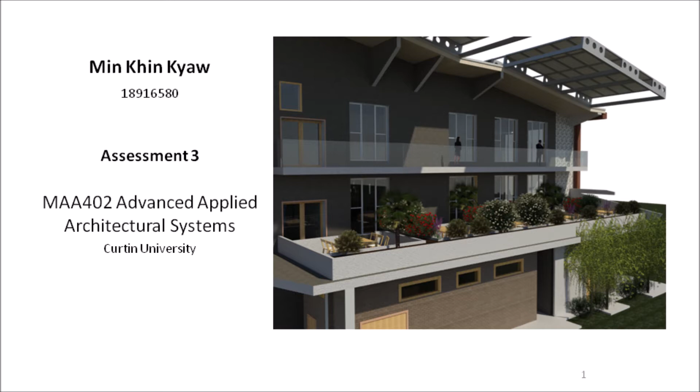My case study is Building 215 of Curtin University. Its location is 12 Ridley Walk, Bentley, WA 6102. My role is to study energy.

The objectives of the study are: first, to identify the environmental and technological systems of the case study building. Second, to develop a new envelope for the case study building. That is, to use an energy analysis tool to test the existing envelope and the new envelope.

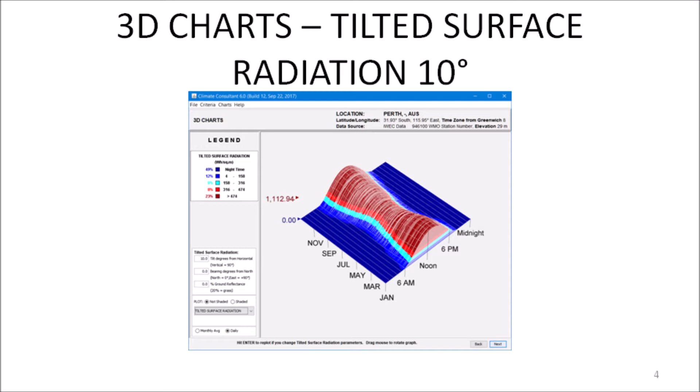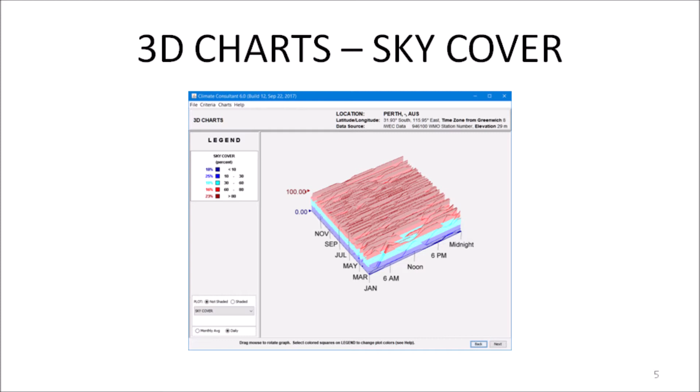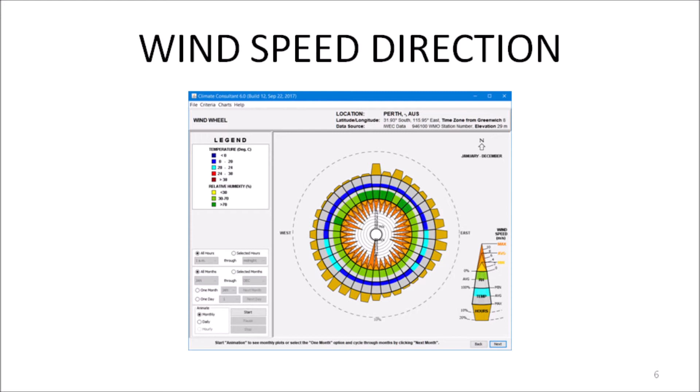Environmental system is the climate and weather. Technological system of a building is everything that makes the building. The building is architectonic components designed and put together by architects and engineers for human occupation. Technological system must be able to withstand undesirable effects and use the desirable effects of the environmental system.

Perth is in climate zone 5, warm temperate. The first stage is to identify the environmental and technological systems of the case study building.

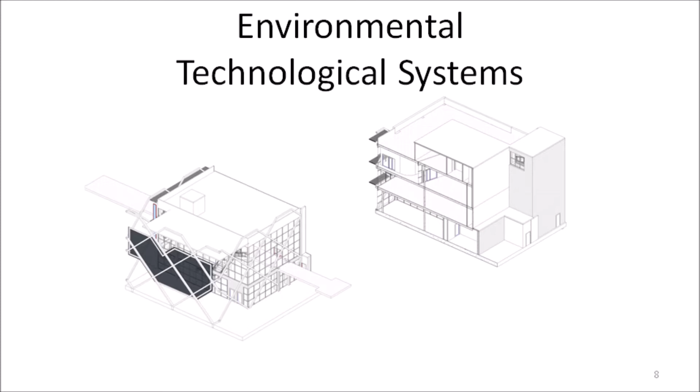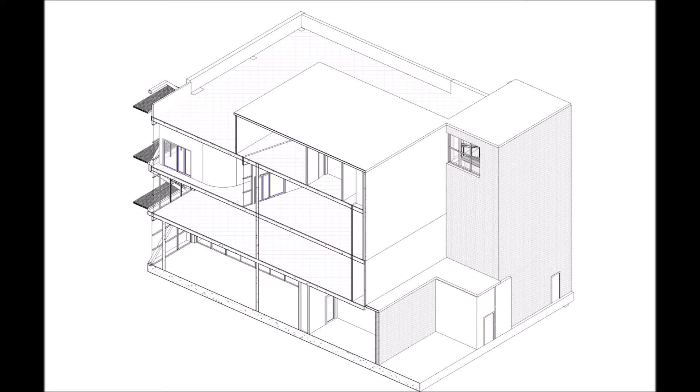The case study building has two halves. The eastern half has 4 levels built with high thermal mass, that is concrete. The walls are concrete and the roof is concrete too. High thermal mass slows down temperature passing through it because it only gains or loses temperature very slowly depending on its thickness.

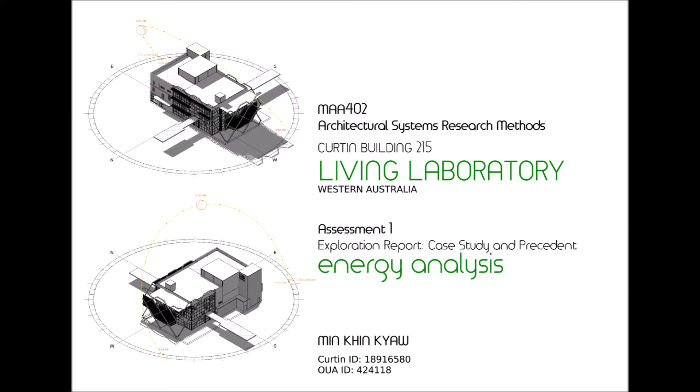That effect keeps the interior temperature stable. In hot summer, humans perceive that interior temperature as coolness. In cold winter, humans can perceive it as warmth. Classrooms are located in the eastern half.

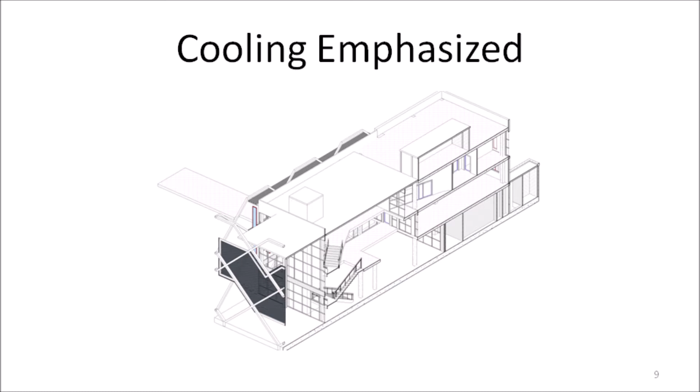This part is highly insulated too. Both exterior walls and interior walls are insulated. It has only a few windows. Daylight and passive ventilation are very limited. It relies on artificial lighting and a large HVAC system, which is located on level 4.

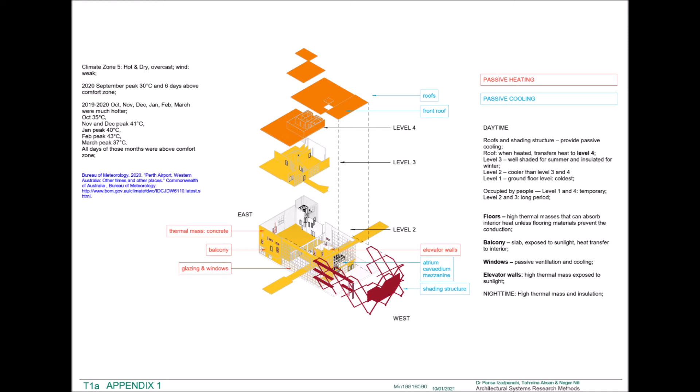The design emphasizes keeping the interior cool. Level 4 roof provides extra cooling. The coldest level might be level 2 or 1.

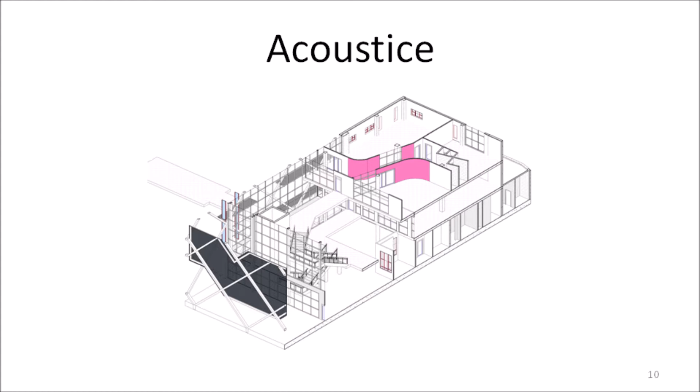The interior walls are curvy. That seems to deal with acoustic performance. The building seems to be cold in the southeast area. This place could be good for summer.

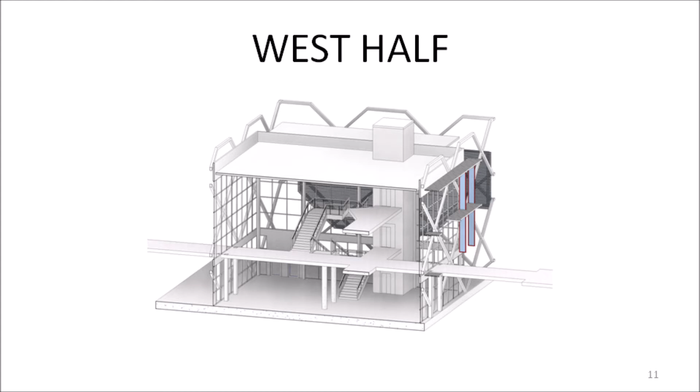The western half is an atrium. Its envelope is metal. The walls are metal and the roof is also metal, which is suitable for wide span. The atrium is highly glazed and light can enter from west, north and south.

During day hours, temperature in the atrium seems to be comfortable. However, it must be very cool at night. There are concrete bridges in the atrium to connect with other buildings. There is an elevator.

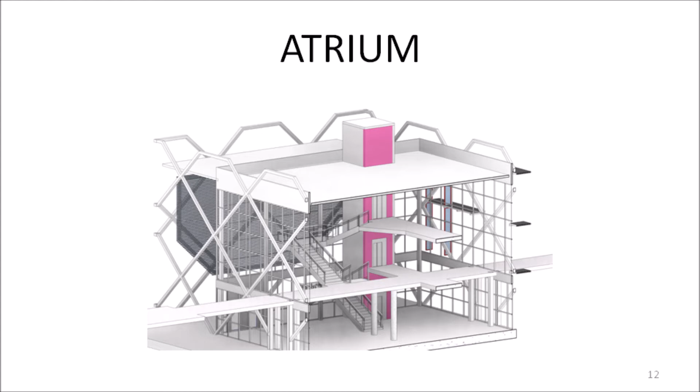The second stage is to develop a new envelope. The role of architecture in energy conservation is to design building envelopes that will provide maximum comfort to the occupants without unsustainable amounts of fuel consumption.

This is done using the right amount of suitable material such as high thermal mass, insulation, and various strategies that could reduce fuel consumption. Zero net energy buildings became popular because they only require energy that can be produced on site or within their boundaries.

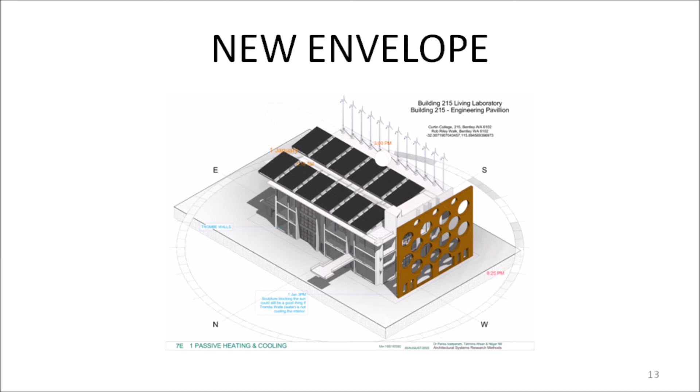That is, to install solar PVs, wind turbines, and other renewable energy technology. Large buildings do not have enough space to produce energy on site. They should be designed with passive heating, passive cooling, and passive ventilation systems that would optimize their performance. Building 215 might have enough space for site energy.

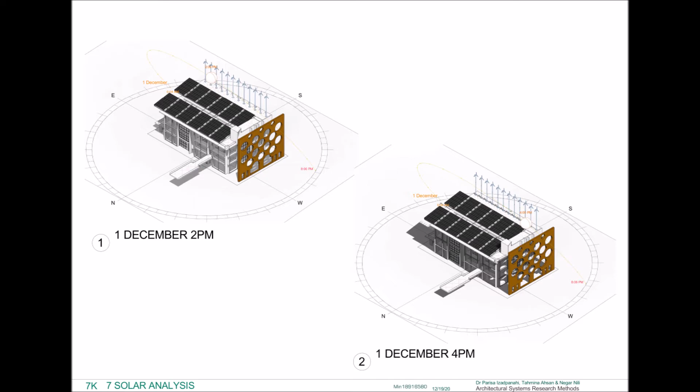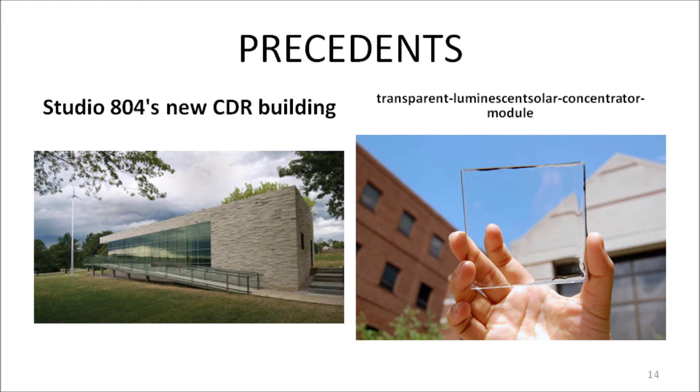To develop a new envelope for the case study building, several precedents were chosen based on lectures that explain about Trombe wall, water wall, and smart glass. These precedents are supposed to be located in Western Australia.

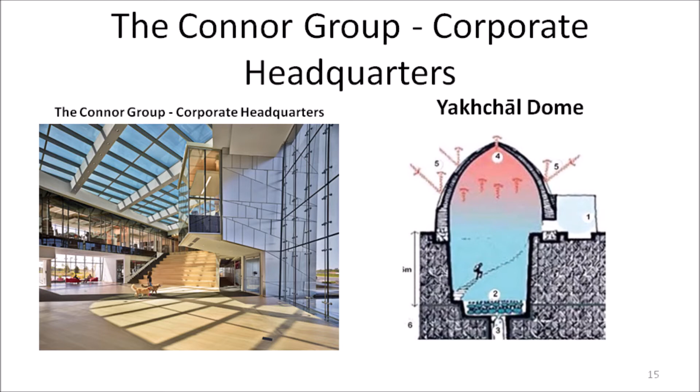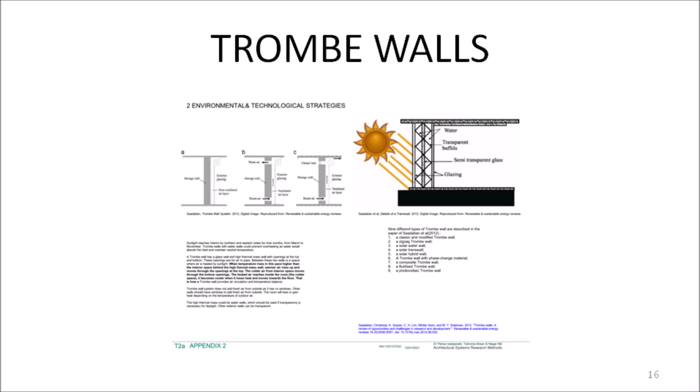However, buildings with Trombe walls do not have images online. They exist, however their whereabouts are unclear. Books only explain about how to use Trombe walls in Australia. I was forced to search for a few precedents that exist in similar climates.

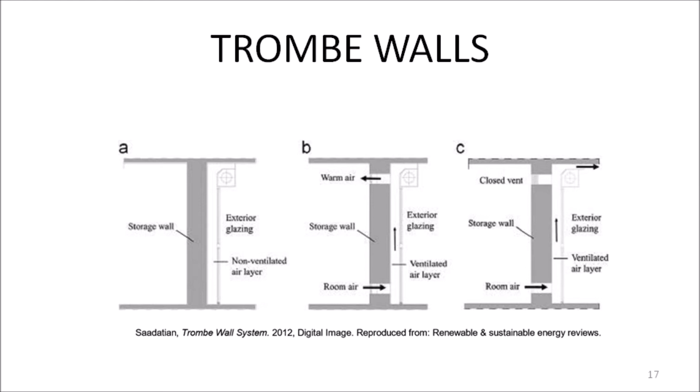My research found different types of Trombe walls. One of them is transwall, which is made of glass and water. Transwall is chosen for the new envelope because I was convinced it would provide something good. However, I could not find any precedents that have transwall.

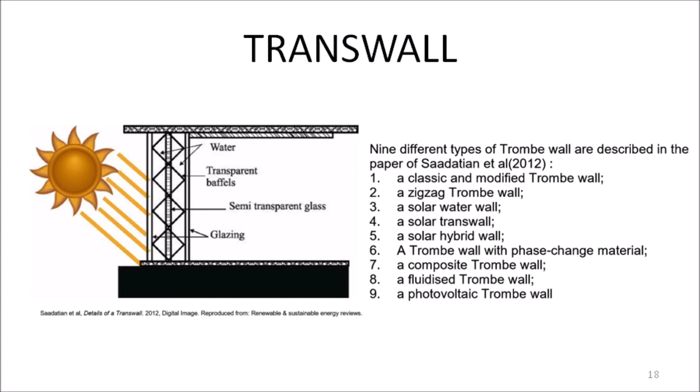To imitate transwall, I developed a Trombe wall design. It has water, transparent glass, and transparent acrylic plastic. Glass sheets and acrylic sheets are 50mm thick nominally. They may be thinner as long as they can support the water.

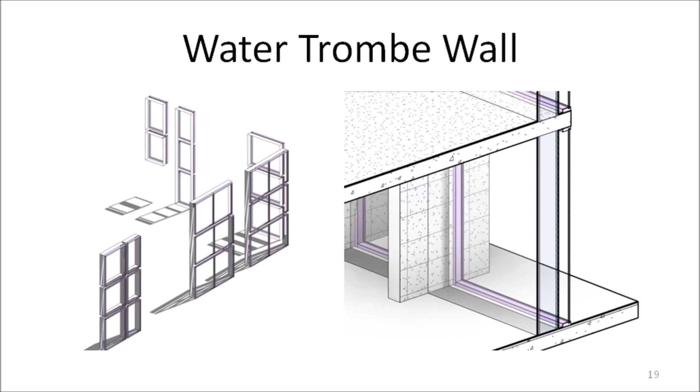Trombe wall is combined with water wall, so I call it water Trombe wall. They are good for preventing noise passing through them, but the glass must be covered with transparent acoustic film. The water can cool down sunlight. Acrylic or plastic panel acts as insulation, so the atrium has proper temperature and daylight.

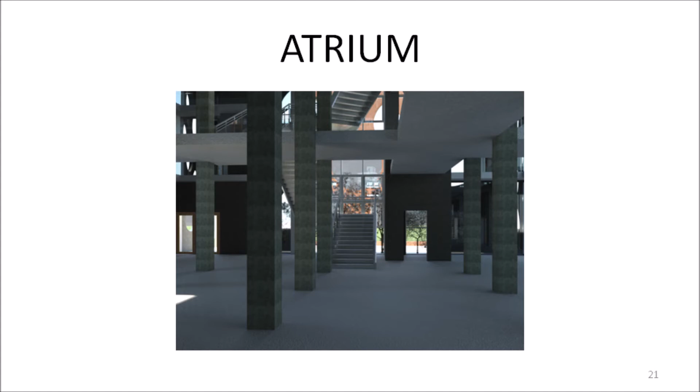The acrylic and glass panel should be as transparent as possible. Water Trombe walls need structural support. Smart glass could be used in curtain walls.

For assessment 3, I have improved the envelope design. The strategy to gain low EUI in the new envelope is very simple.

Allow sunlight to reach the interior with some heat. When the interior is overheated, it's time to use passive ventilation. Windows are added to certain walls and the eastern sides of the building.

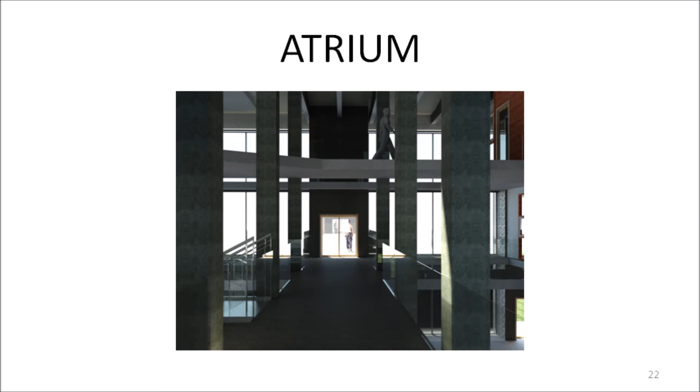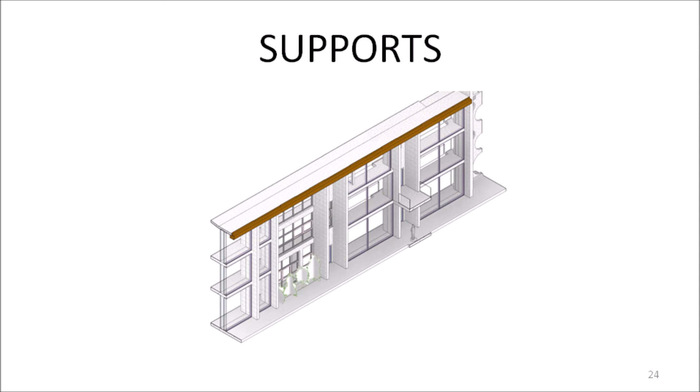The southern exterior walls are sandwich panels. Water trombe walls are supported by concrete slabs and concrete walls that also support the concrete roof, gutter, and downpipe. Roof slope is 10 degrees, which is good for solar PVs and collecting rain.

A rainwater treatment facility is located under the balcony. There is a well for overflow. When the water tank is fully filled by rainwater, the overflow can go into the well directly or after filters.

The well could be used for cooling warm air from outside. In summer, cooling and ventilation can be achieved by pumping fresh air from outside into the well and forcing the cool air inside the well to enter the building. This strategy is adopted from Yakhchāl dome.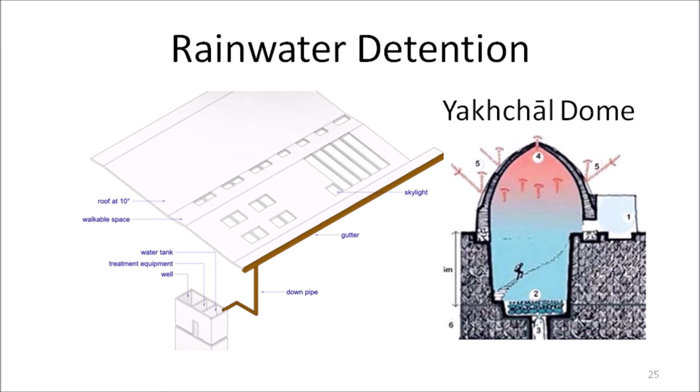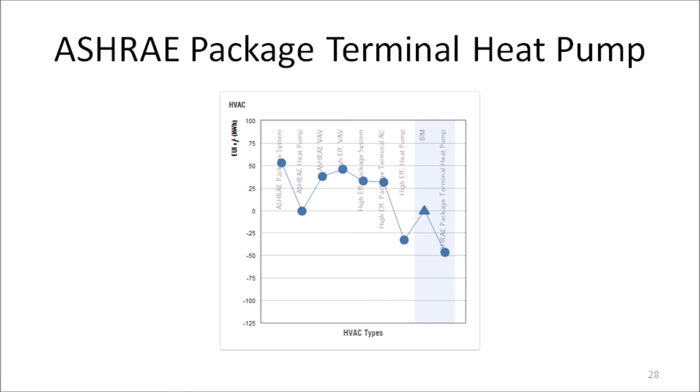To create the slope, the roof was redesigned and level 4 was moved to the southern side. Level 4 is being used as the space for the HVAC system, but in the new design this HVAC system is no longer required. The new system recommended by Insight is ASHRAE package terminal heat pump.

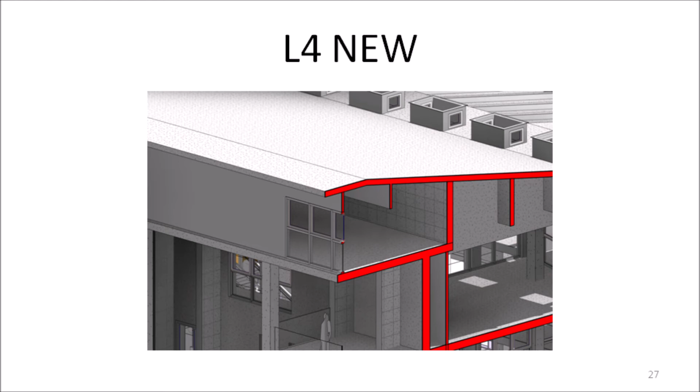Both the new roof and level 4 are concrete to provide long-term structural integrity and fireproofing. If solar panels are installed, level 4 can be used as a battery room, which must be fireproof.

A new veranda was added to the eastern side to provide space for relaxation. This is for an aesthetic purpose as well.

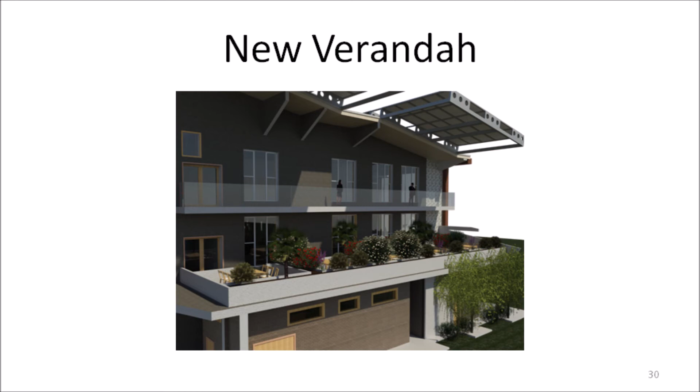To climb the roof, the elevator is extended to level 4. This is needed for installing and maintaining the PVs. The concrete roof is heavy, so columns were added to support them.

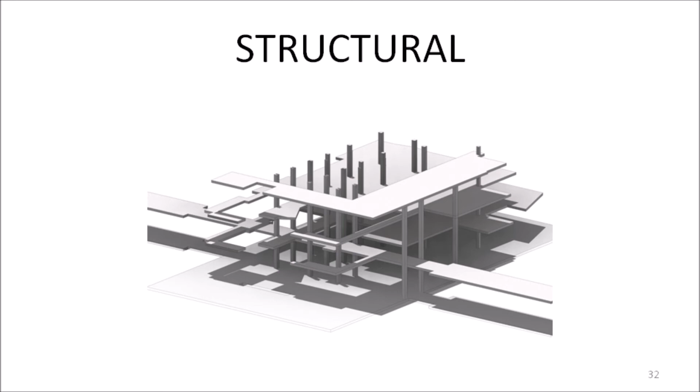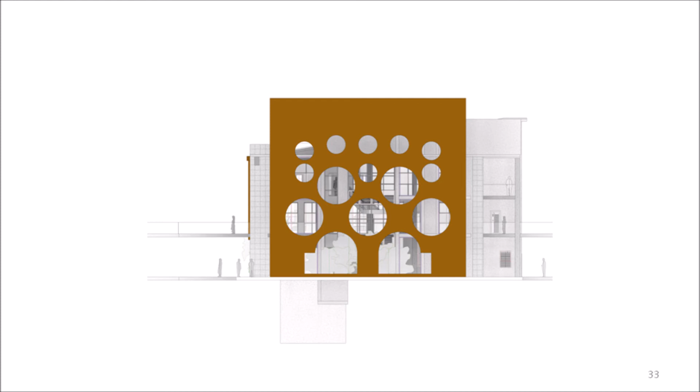The western side has a sculpture to provide aesthetic quality once the sculpture is heated by the sun. Air inside will rise, and if linked to interior spaces with copper pipes, passive ventilation could be created. Warm air inside the sculpture could be pumped into cool areas. If this strategy is not used, the sculpture can be smaller.

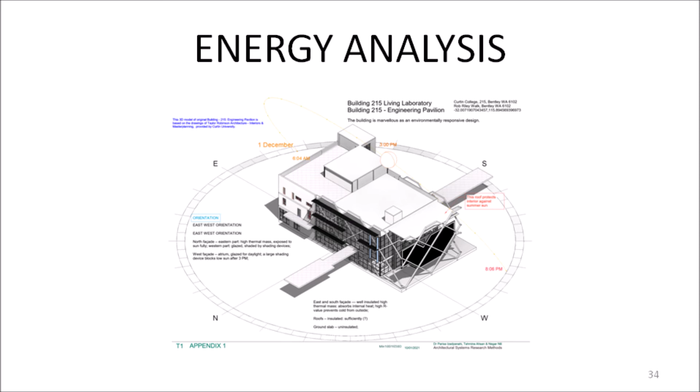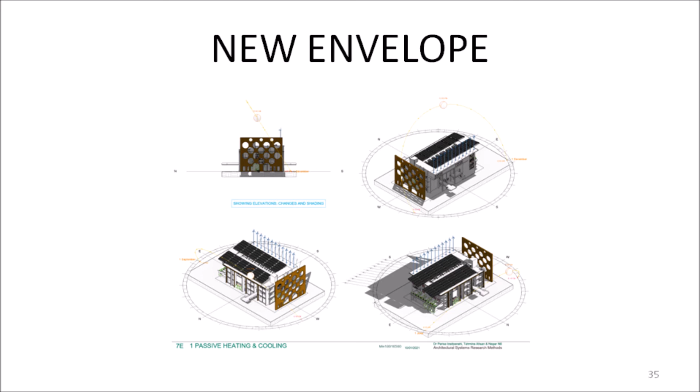The third step is to use an energy analysis tool to test the existing envelope and the new envelope. I tested these two models in Autodesk Insight Analysis software. This tool analyzes models of existing or conceptual buildings to explain how their designs consume energy to meet maximum performance and provide human comfort inside these models. The software does not know or is able to analyze all strategies that could possibly be used in these buildings.

Based on the drawing files provided by Curtin University, I developed a Revit model of Building 215. Based on that model, I developed a new envelope. I provided these two models to my group. The results are...

301 kilowatt hour per meter square per year is the EUI of the original envelope. 236 kilowatt hour per meter square per year is the EUI of the new envelope. The new envelope gets slightly better EUI.

Energy use intensity, EUI, is the amount of energy needed by a building to function and to keep the interior at the temperature in which humans feel comfortable. This is called the comfort zone. The temperature range is between 18 degrees Celsius and 25 degrees Celsius.

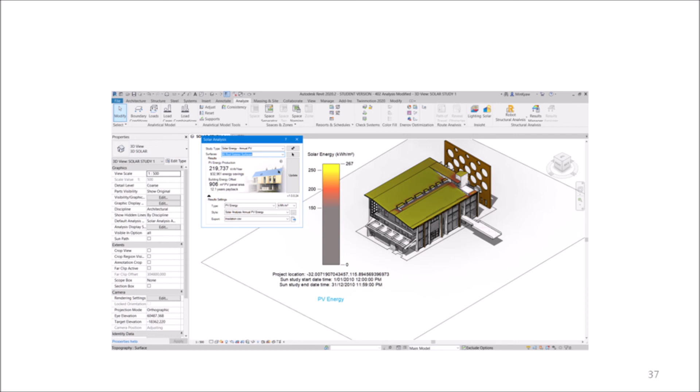The software also calculates PV surface. If the roof has a slope, the EUI could change. After calculating the PV surface, the EUI of the original building does not change because the roof is flat.

However, a deck can be built on the roof to support PVs. On the rooftop, that envelope has a few PVs. Its roof design is not suitable for many PVs. After the PV surface is calculated, the EUI of the new envelope is 193 kilowatt hour per meter square per year.

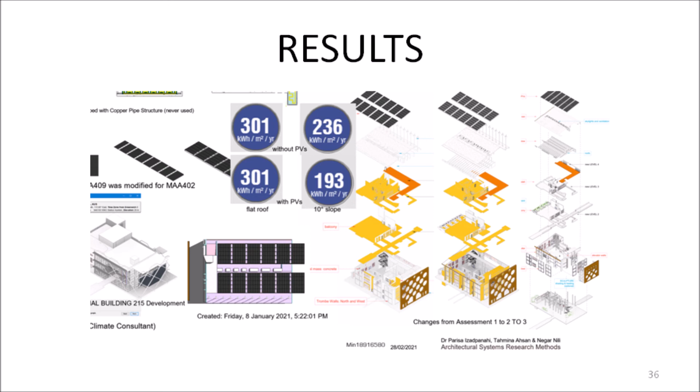Water trombe walls need water. Without water, EUI increases. With water, EUI decreases by about -9 kilowatt hour per meter square per year.

The test shows skylights can reduce EUI. More daylight and solar gain seem to improve building performance.

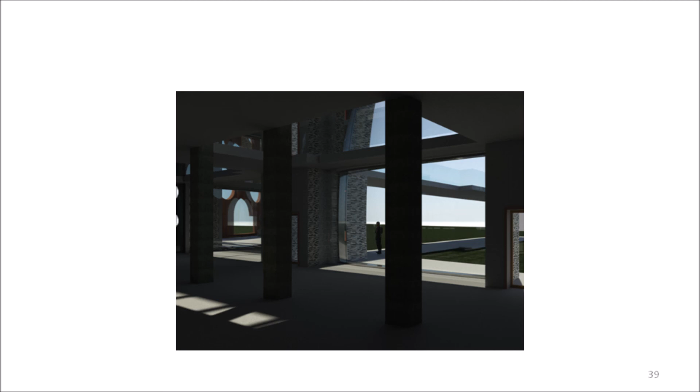The main reasons for achieving low EUI are water trombe walls. Water is able to cool down the sunlight, while transparent glass and transparent acrylic allow sunlight to pass. The acrylic and glass panels should be as transparent as possible. Acrylic sheets act as insulation. The walls that support the water trombe walls act as a shading device.

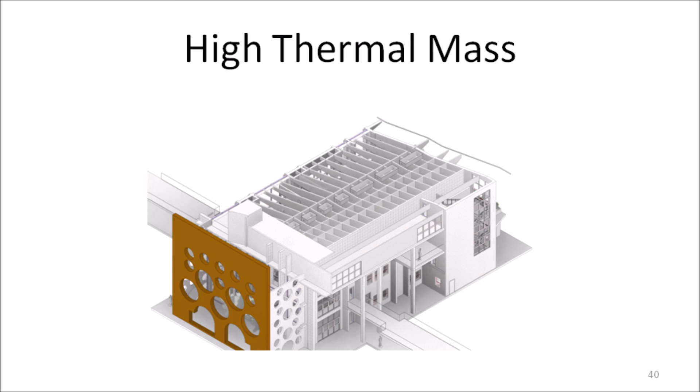Windows provide daylight and passive ventilation. There are many windows added around the building. Skylights were added to provide more daylight and solar gain.

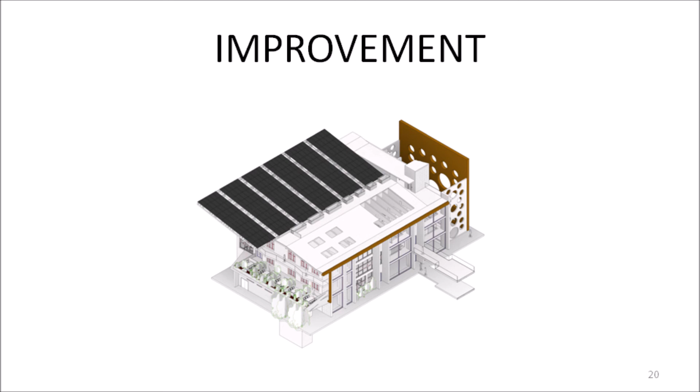More high thermal mass was added to the roof and the walls. These walls provide some shade. The roof slope is 10 degrees, which is the optimal slope for this part.

I believe this new envelope will improve the performance of Building 215. Thank you very much for listening.